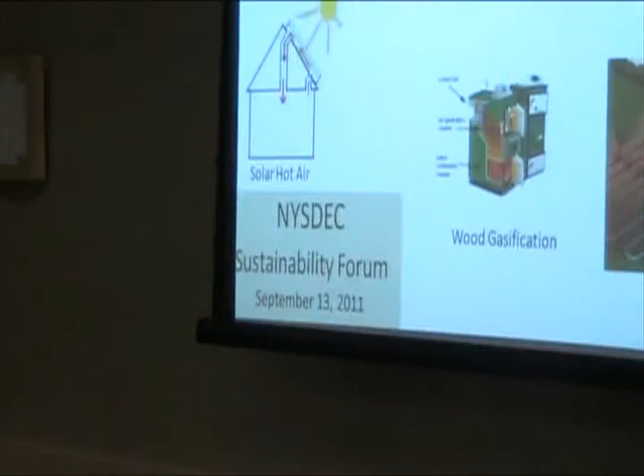Welcome to the monthly Sustainability Forum. This is part 2 of a special forum presentation. Part 1 was all about photovoltaics. Today is 5 presentations on a variety of other topics. The first 3 are renewable energy topics. The other 2 are greener heating topics. And we have a lot to cover, so we're going to get going. We'll have probably 10 to 15 minutes per presentation with a little bit of Q&A after each presentation, and then hopefully some time at the end. And maybe our speakers will stay around after the hour and a half is up and answer some more questions.

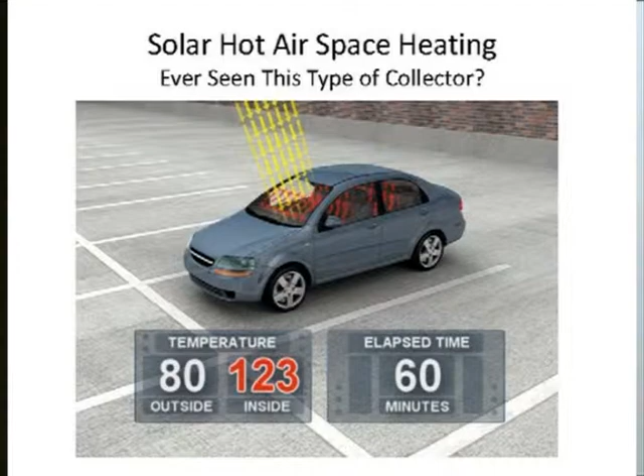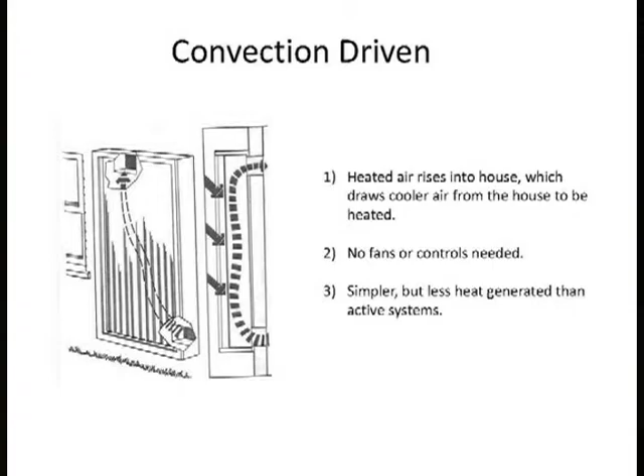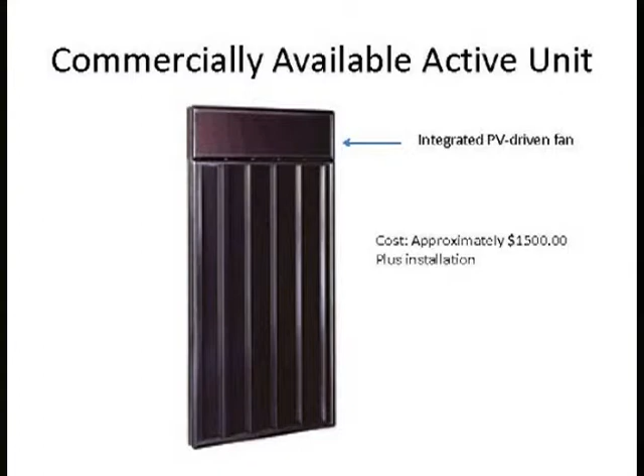So I'm just going to show you a few pictures. We're going to bring Tom up, and Tom will tell you about his system. So this is the basics of a solar hot air collector. The sun comes through the glass, heats up an absorber, causes the air to heat up. The hot air rises, draws cool air out of your house as the hot air goes into your house, and it just keeps going as long as the sun hits the collector. Another style, convection driven. You don't need fans to do it. This is a typical commercial unit. It's got a fan built in. You get a little more heat out of it. It costs a little more. And here's a variety of ways you can install these. And there's others if you're creative. It's elegant. It works. They make a lot of heat.

Hello, excuse me? Yes? Can we see the slides? Yep, sorry, we're working on that. Oh, okay. All right, then.

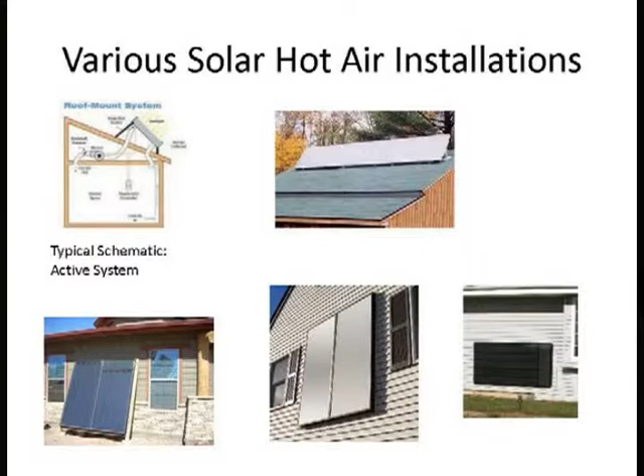When I first bought my house back in the mid-1980s, one of the things I was looking for in a house was the possibility that it had some possibility for solar retrofit. I was looking for a good unobstructed solar south exposure. So I bought my house in 1987.

In 1989, you see that triple casement window up there. I had that installed in 1989. Then in 1998, in very early 1998, I had that 4-panel active solar collector installed by a local firm, One Energy. The other possibility when I had that installed was James Duggan Solar Systems.

I decided to go with One Energy because they were using mostly off-the-shelf components. Mr. Duggan was manufacturing his own proprietary collector, but that might possibly have functioned better. In any case, I think both those firms are still in the area, although One Energy's contractors have moved away, so I don't know if they're still doing installations.

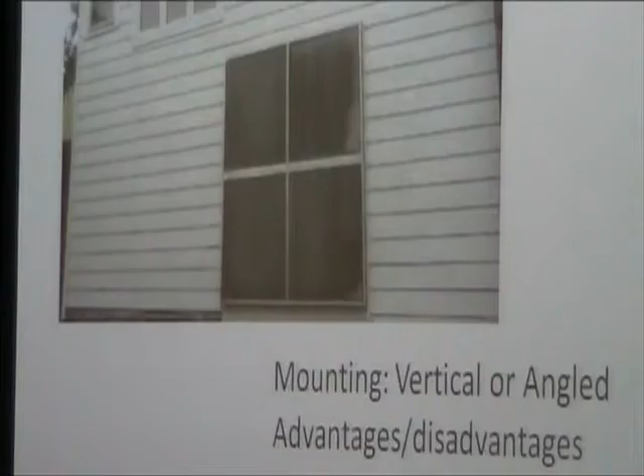I have some thoughts about active versus passive systems. On the one hand, active systems, they do use energy, although they make far more energy than they use. They do have more moving parts. They're somewhat more complicated.

On the minus side, often during the winter, on a bright, sunny, cold day, when I'm walking around outside, I see a lot of south-facing windows, and the shutters and shades are completely drawn. I don't know if people aesthetically don't like sunlight streaming into their houses during the winter. In that case, they just might not like a passive system. They might prefer to go with active.

I am concerned also with birds striking the window. I've actually taped little bits of dark-colored paper inside the window in the hopes that birds would know that's not just an unobstructed empty area. I don't know of any bird strikes on my window, but since most days I'm here at work, I don't know if that has happened in my absence.

Okay, well, I'll describe the active system since that's more complicated. The collectors were made by a firm in Arizona. I don't know if they're still in business or not. As I understand it, they're made out of aluminum. The glass is the sort of glass that, if it should fracture or shatter, it breaks into pebbles as opposed to big shards.

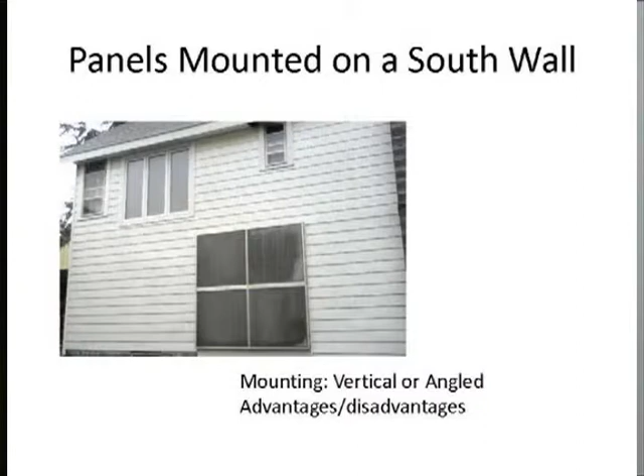There's an internal sensor inside the collector, so the system will know when it's heated up enough to produce heat. There's a damper to prevent cold air from flowing back out of the collectors when the sun isn't shining. There's a thermostat, and also there's about 25 feet of duct leading from the front of the house to the collector inlet.

Let's see if this... You need a laser? Okay, can I borrow that, please? Thanks.

Okay, the collectors are basically set up in series. There's an inlet that I mentioned below there. That's the outlet of the bottom collector. It goes to the inlet of the next collector up from that. And then the warm air goes into the house, first floor.

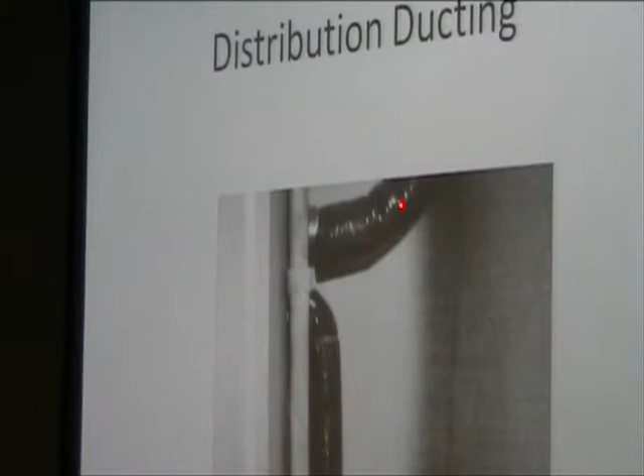It basically performs pretty well. On a full sunny day, usually the collectors come on at about 10 in the morning. They run until about 3 p.m. at least, even on a cold day. The furnace comes on about 2 or 3 hours after that. The temperature of the air coming out of the collectors, usually it's between 150 and 160 degrees Fahrenheit. I think that's a little too high to be ideal.

I suspect that the system would be more efficient if either there were a higher rate of flow of air through the collectors, or possibly if the collectors were hooked up in parallel rather than in series, if they both had their own inlet of cold air and both of them were just exhausting hot air direct into the room instead of one collector into the other, preheating it.

Let's see. The air coming out of the second collector was formerly higher. It sometimes got up to like about 165 or 170 degrees. I made some modifications to the system. There were some grates on the inlet and outlet for the air. I removed them so that the air could come through more unobstructed.

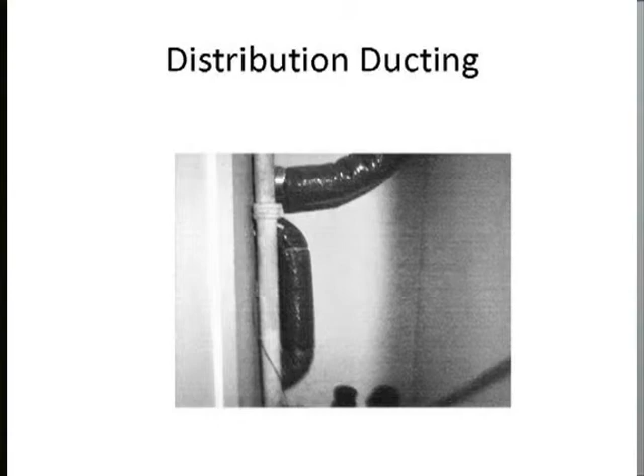I also rotated the damper in the bottom collector so that instead of hanging vertically, it was more like at an angle. So the full weight of the damper wasn't holding it shut. It would open more easily from the incoming air.

I also set the controller. Initially it was set to come on when the collector temperature reached 110 degrees and go off when it fell down to 90 degrees. I lowered the start temperature to 100 degrees so that it would start more quickly at a cooler temperature.

Basically, the system works pretty well. In spring and fall, I rely on that as my primary heating system. I turn the main gas-fired furnace off, except on a very cold day or cold night.

Initially, I was worried that the air coming out of the collector, it's only less than a foot below the ceiling. Initially, I was a little worried that the warm air might cause the ceiling plaster to crack, but that hasn't happened, and it's been about 13 years. That's about it.

Oh, I have some handouts, if anybody wants to see them. There's something produced by that other firm, Duggan Solar Systems. I don't know if it's still current. And I have 2 copies of 2 publications that DEC published some time ago.

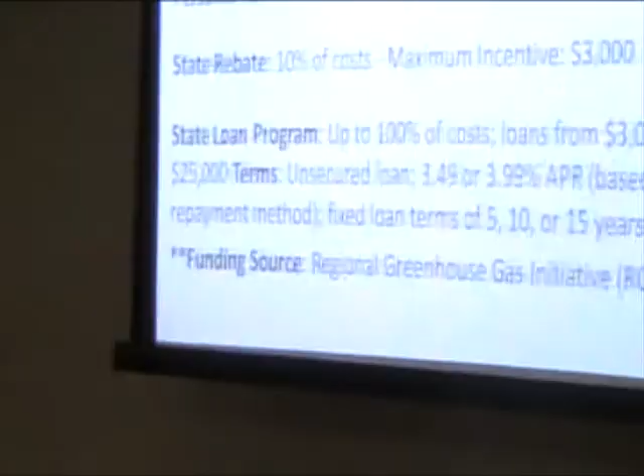There are a couple of incentives for hot air as well, and you'll see throughout the slides today that there are incentives for a lot of what we're talking about.

Okay, Jim. And how do I change the slides? Just here? Down arrow. Just down arrow. Or page down. What's that? Or page down. Okay. Or down arrow.

All right, this all got started for me back in January when I was heading north with a friend who works for NYSERDA. And of course, we're talking on the way up north, and he mentioned to me that there's incentives available for solar thermal. And I said, oh, that's interesting. Tell me more about it. And he proceeded to tell me that there's a lot of money available for residential solar hot water systems. So I basically took the initiative and started looking into it.

And one thing led to another, and I am now the proud owner of a solar hot water system, which is producing 100% of my hot water needs, domestic hot water. So let's see if I can make this work here. Down arrow.

Okay. Most of you already know that there's basically two types of solar energy. There's light energy, photons, and there's radiant energy, heat, and both of those you can take advantage of. The easier one to take advantage of is hot water, because it requires less technology to get that energy into usable form.

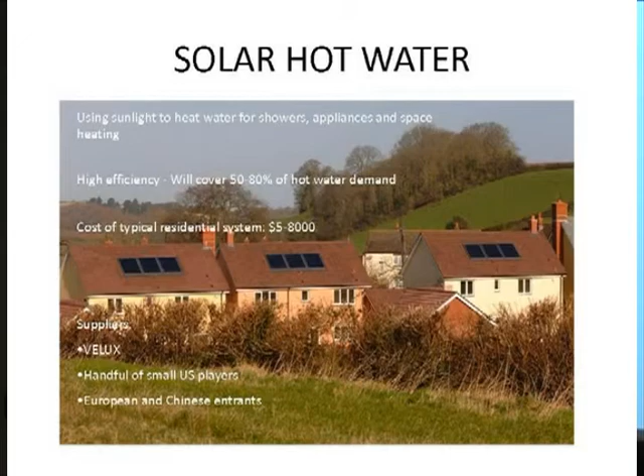anyway, some points here are that the slide states that this will cover between 50 to 80% of your hot water demand. In my case right now, it's covering 100%, and I'll explain that a little bit later. And the system cost, that is also malleable because there are some incentives available, which I'll get into a little bit later. And you have different companies that supply solar hot water systems, and I'm going to explain exactly why I chose the company I did and what your options are.

For me, it's a no-brainer. Solar hot water is the easiest entry for anyone that wants to do solar of any kind. It's a lot less expensive than solar photovoltaic, maybe not as sexy, but you're going to pay a lot less money for taking advantage of solar energy with a solar hot water system than with a solar photovoltaic system.

This system was installed in late April, and it began operation on or about May 2nd. About 2 weeks later, I decided to turn off the electric backup inside the hot water tank, which is there to make up whatever the sun is not providing if you have an extended period of cloudiness and so forth. So that electric heating element kicks in if your solar system isn't doing its job.

Well, I turned off the electric altogether, and it's been off since mid-May, and I've had no problems whatsoever with having enough hot water. Granted, this is a one-person household, so results may vary, but I have not had any problems at all with producing enough hot water.

The system was purchased from the Radiant store in Malta. They are a supplier of the Velux solar hot water systems. That's an integrated system. You're not buying a component from here, another component from there, and coupling them together. It's designed to work together, all the components, so you have the confidence that these elements will all work together.

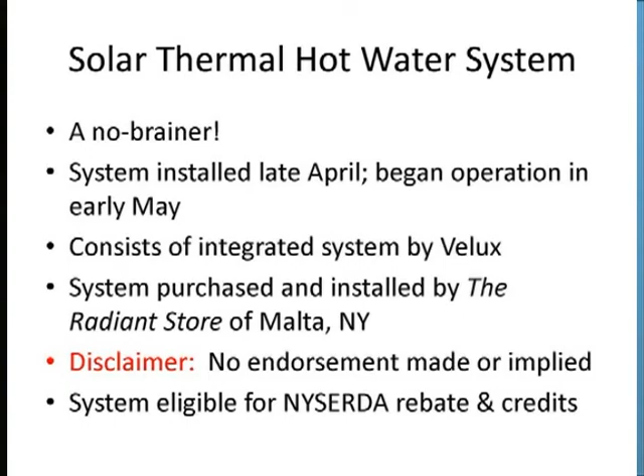Yeah, for residential customers who have electric hot water heaters, okay? This rebate program only applies to people who are heating water with an electric hot water heater. And the big picture idea here is to reduce electric demand in the aggregate. So if you've got, basically